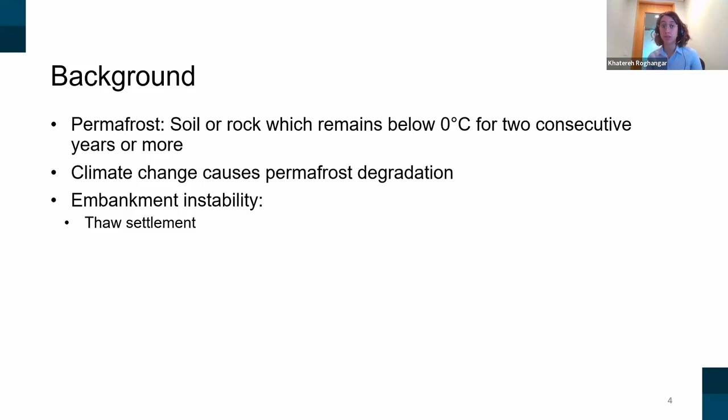Thaw settlement is the most common hazard in cold region infrastructure, and deterministic analysis does not capture the uncertainty; it just gives you a single outcome instead of a range, and the uncertainty in soil properties and climate scenarios needs to be incorporated. That's why we defined our main objective and problem statement: to develop a probabilistic methodology to assess thaw settlement under climate change.

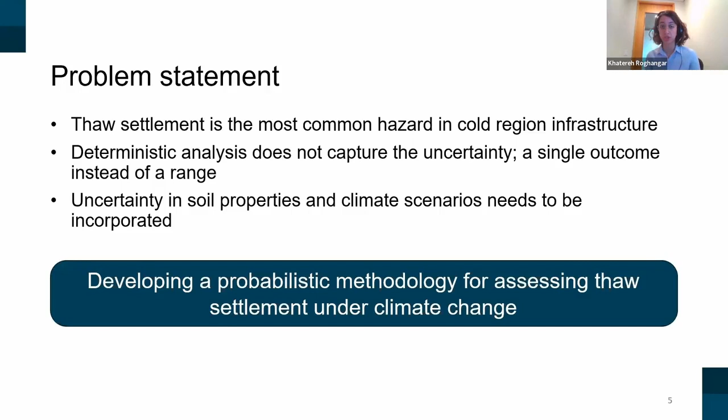To do this big objective, we defined a couple of sub-objectives. One is evaluating the climate impact on embankments in permafrost regions. Another is to integrate probabilistic analysis with thermal modeling, then apply the methodology to linear infrastructure, the railway and highway, and then assess the serviceability and optimize the maintenance strategies.

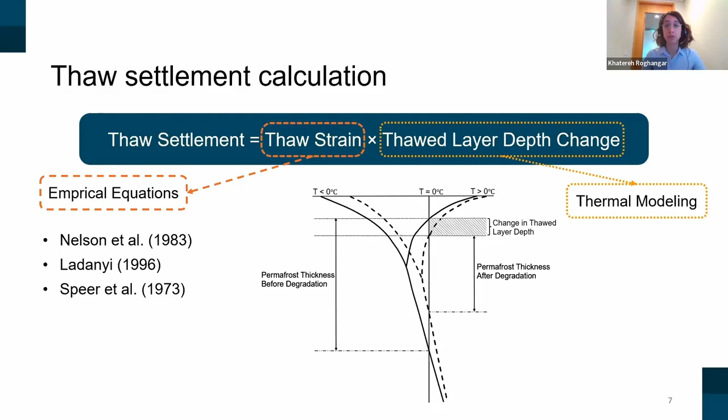Before jumping to any analysis, I should clearly mention that we calculated thaw settlement using the formula you can see. Thaw settlement is the thaw strain times the thaw layer depth change. We got the thaw strain from empirical equations in the literature, from Nelson, Ladanyi, or Speer, and we calculated the thaw layer depth change from the thermal modeling done using the TEMP software. Now let's talk about the deterministic analysis.

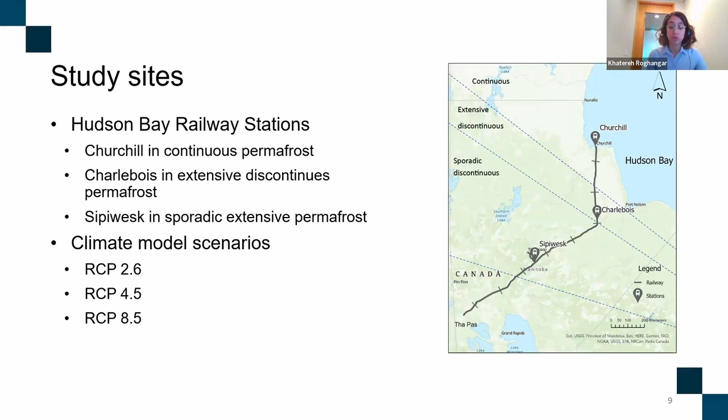We chose 3 study sites on the Hudson Bay Railway corridor. The first was Churchill, located in continuous permafrost. The second was Charlebois, in extensive discontinuous permafrost. The third was Sipiwesk, in sporadic extensive permafrost. To do the analysis, we chose 3 different climate scenarios from CMIP5: RCP 2.6, 4.5, and 8.5.

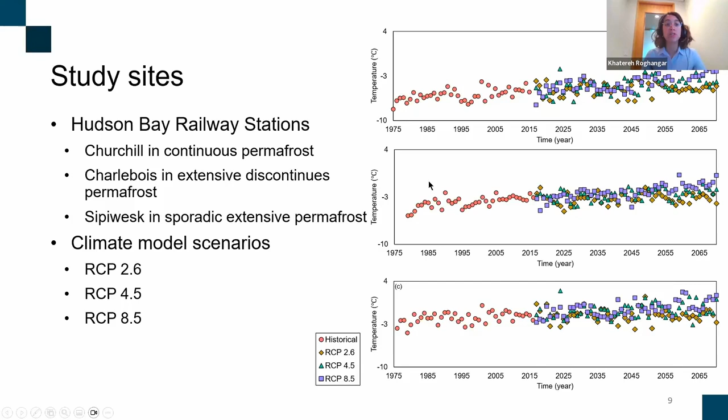What you are looking at here is the air temperature we used for the thermal analysis. The red dots are the historical temperature, and the others are RCP 2.6, 4.5, and 8.5, from the top for Churchill Station, Charlebois, and then the Sipiwesk station.

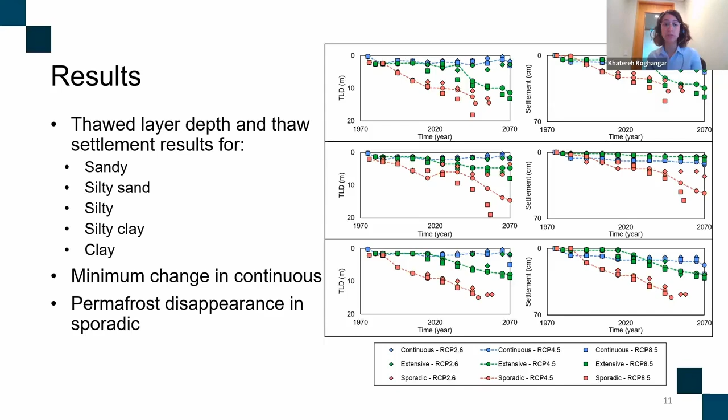But it's important to know that you can see the minimum changes in continuous permafrost because of the colder climate for now and for the future, and the permafrost disappearance in some of the cases in sporadic discontinuous permafrost.

But let's jump into our main contribution, which was developing the probabilistic methodology. But what was the main principle of what we have developed? It was integrated probabilistic thermal modeling to predict thaw settlement and the serviceability of the embankment. So we have done the probabilistic analysis using the Monte Carlo simulation as solver, and we have done the thermal modeling using TEMP. But what is Monte Carlo simulation?

Monte Carlo simulation is a computational technique that can be used to study systems that include uncertainty or randomness. There are a couple of steps to do Monte Carlo simulation. First of all, you should identify your components, and then you should define your parameters. They could be deterministic or probabilistic. It totally depends on your problem and the data that you have.

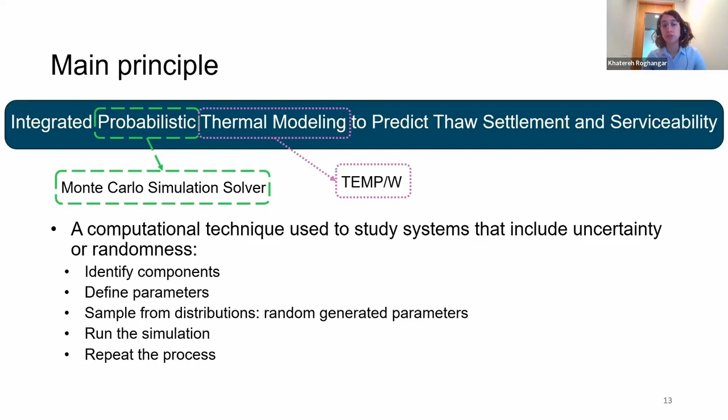And then for the probabilistic parameters, you should get samples from their distributions that you've previously assigned and defined based on, again, the data that you have and your assumptions. You are going to randomly generate the parameters. You should run your simulations and then repeat the process for the other iterations. And the number of Monte Carlo simulations, again, totally depends on you and the problem that you're looking at.

So to do this integrated probabilistic thermal modeling, we have developed a custom Python tool that performs the Monte Carlo simulation. It automates the input generation for thermal modeling, or the TEMP. It calculates the thaw settlement after doing the TEMP analysis, and then it assesses the long-term serviceability of each embankment, and it optimizes grading intervals based on the performance thresholds.

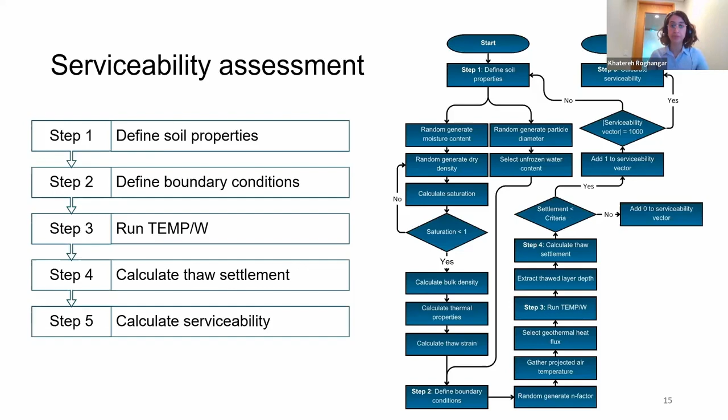But another important part was the optimization method that we've developed. So at the start, you should set your thaw settlement criteria, as I mentioned before, and also your serviceability criteria. For example, you want to have 70% serviceability, and it means that you are going to have your embankment to be serviceable 70% of the time.

After calculating the serviceability and comparing the serviceability with your criteria, it's time for you to decide whether you need grading or regrading your embankment or not. So if the serviceability of your embankment was more than your serviceability criteria, you don't need any grading. But if it was less, you should grade for X years, and X is defined based on your project. For example, it could be 20 or 15 or something.

And then you should again calculate the serviceability and compare it with the criteria. After finding all of the serviceabilities for each year were more than the criteria, you're done and you have a number for the optimized grading interval.

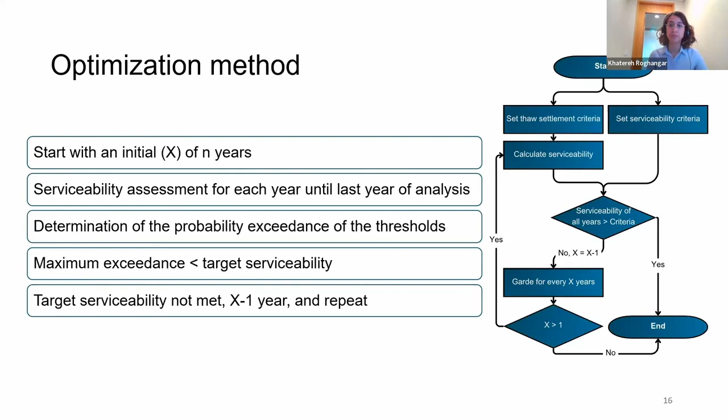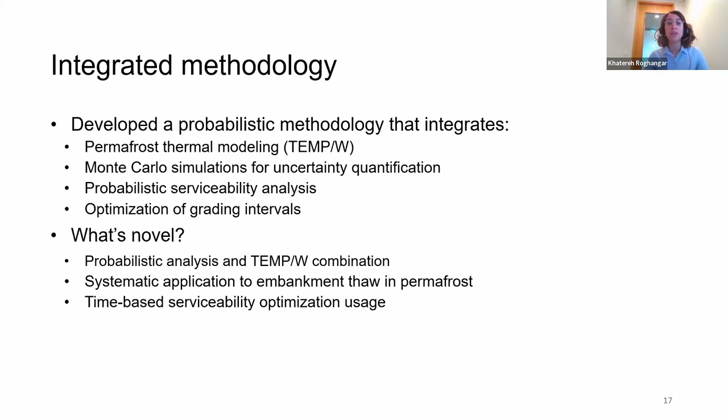So to wrap up what we have done, I can say that we have developed this integrated methodology that does permafrost thermal modeling. It integrates Monte Carlo simulations for uncertainty quantification, and then probabilistic serviceability analysis and optimization of grading interval. But what's novel? What is new about what we have done? The probabilistic analysis and TEMP/W combination is new. The systematic application to embankment thaw settlement in permafrost, again, this is new, and the time-based serviceability optimization usage.

We had 4 initial temperature conditions, which represented different active layer thicknesses at the beginning, which were 0.5, 1, 1.5, and 2 meters. And the boundary condition was the same as the deterministic analysis. The difference was that the N factor was randomly generated this time. And because we had access to CMIP6 climate scenarios, we have used the SSP5-8.5 climate scenario. So based on different conditions, we have done 7,000 TEMP/W simulations for different scenarios.

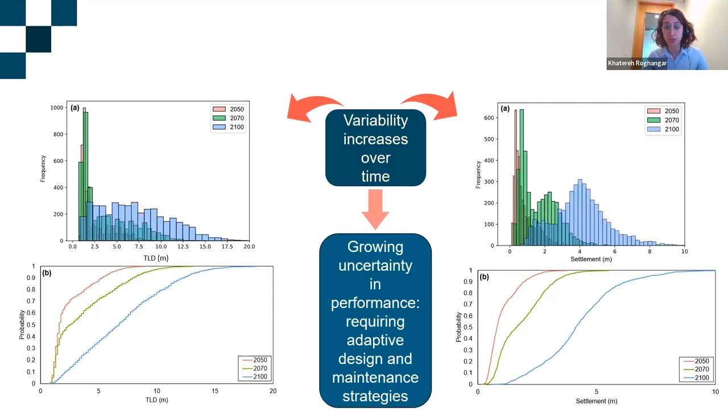So the histograms of the 2100 results for both of the outcomes are much wider, and the CDF plots are less steep. But this growing uncertainty, what is its implication in the performance of the embankments? It means that we are going to require adaptive design and maintenance strategies to be able to keep up with the climate change and the variability that is increasing over time.

And now let's look at the second application, which was on the Inuvik Tuktoyaktuk Highway embankments. So what you can see in the figure is a map of the Inuvik Tuktoyaktuk Highway, and the purple dots are the boreholes that we have used to do our study. So we had 10 boreholes along the ITH corridor, and the mean annual ground temperature at the study sites were between minus 6.5 to minus 3 degrees Celsius in 2017, which is the year that the ITH opened, and we have started analysis from that time.

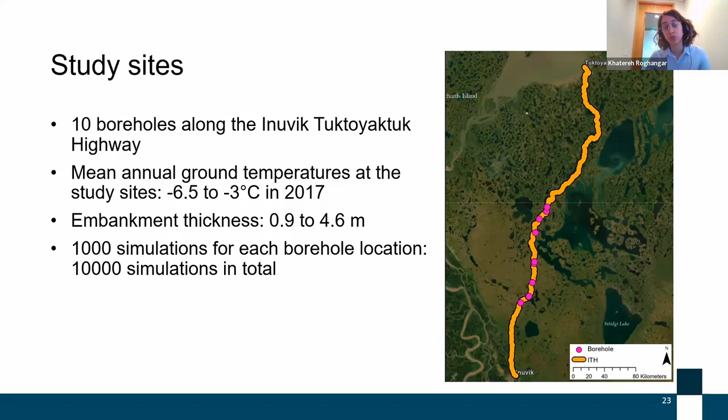The embankment thickness was an important factor here. It varied from 0.9 to 4.6 meters in different boreholes, and we have done 1,000 simulations for each borehole location. So in total, we have done 10,000 simulations.

What you're looking at here is an important result. So you're looking in the y-axis at the differential TLD prediction. Differential TLD means the thaw layer depth at the year that we had in, for example, 2030, 2050, or 2070, minus the initial thaw layer depth at the beginning of the analysis.

So first of all, I should mention that we've categorized the results based on the fill height. So the blue colors that you are looking at in this figure are the thin embankments that had less than 2 meters fill height, and the orange ones are the thick embankments that had more than 2 meters of fill height. But what is obvious here is that most of the thin embankments, except for the ITH 13, have a jump in both the magnitude and the variability of the differential TLD predicted by the year 2070.

And it's really important. It's showing the significant effect of the fill height not only on the magnitude but also on the variability of the predictions. It's important because it supports the need to incorporate embankment thickness as a key parameter in design. So if you have designed your embankment to be, for example, 2 meters and you ran out of money, you may save money at the time of the construction by reducing the fill height, but it will cost you more in the future.

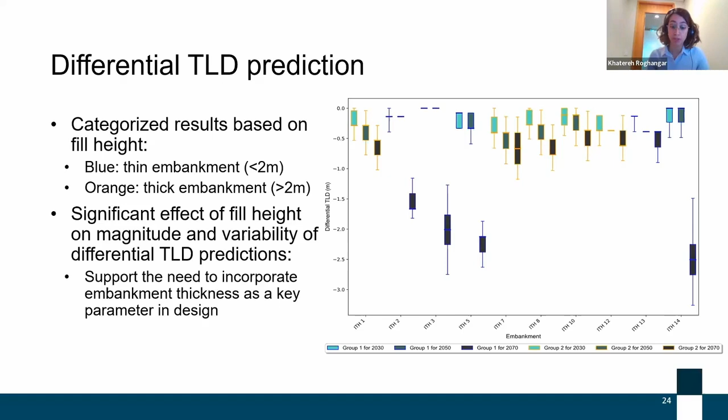And now let's talk about the serviceability assessment that we have done. So we needed a criteria to compare our serviceability and our thaw settlement at this part. But I should mention that serviceability in this study is a pavement's ability to perform its function, which is providing a smooth, durable surface that ensures ride quality, structural integrity, and safety. So we found the International Roughness Index, or IRI, which is a widely used metric for quantifying road roughness, and we have used it to define our thaw settlement criteria.

So the localized thaw settlement can contribute to increased IRI. The more IRI you have, the more roughness you are going to have, and your road is going to be less serviceable. So if you have a thaw settlement at your study site, at your borehole, it's going to increase the IRI.

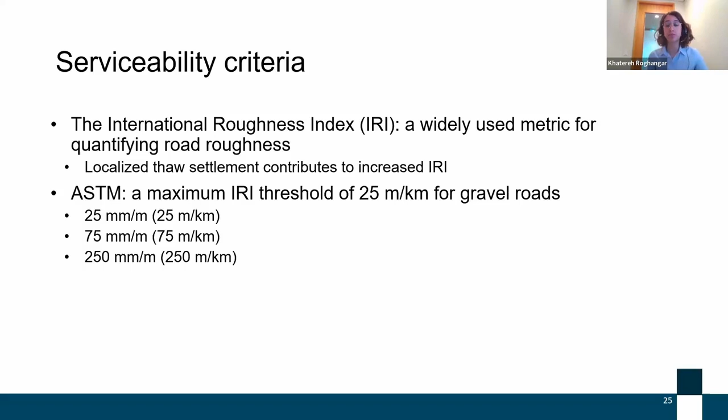But we had looked at different guidelines, and ASTM recommends a maximum IRI threshold of 25 meters per kilometer for gravel roads. But for northern regions and roads and highways, 25 millimeters per meter technically means that you have 25 millimeters of settlement at your location, which is too low because of the size of the trucks and the other factors. So we have defined our thaw settlement thresholds to be 25 at minimum, 75, and 250 at maximum, to be able to look at the serviceability of different embankments.

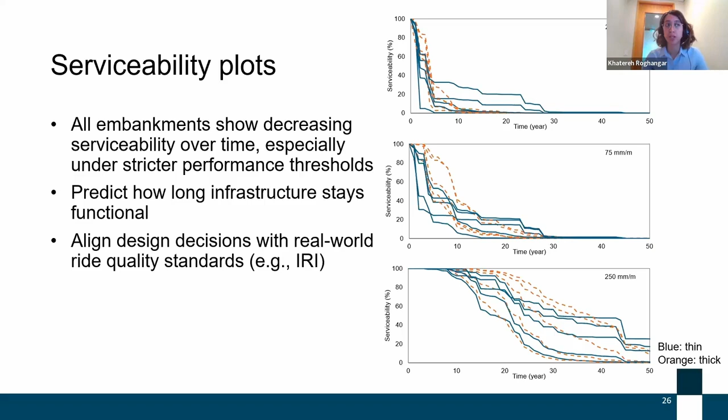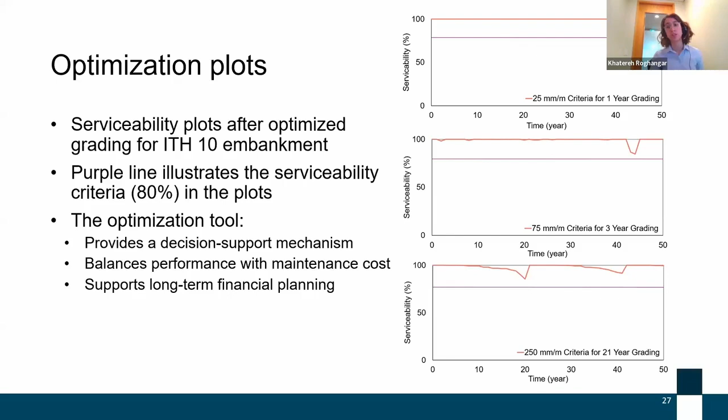But this optimization tool provides a decision support mechanism. It allows engineers to plan interventions proactively rather than reactively. It balances performance with maintenance cost, so you should only grade when needed, not too soon or not too late. And it supports long-term financial planning by aligning maintenance schedules with budget constraints and performance goals.

To wrap up, what were our results' implications for engineering practice? As I mentioned, traditional design often relies on single deterministic predictions, and they are blind to worst case scenarios and under or over design. So the work that we have done enables the probabilistic analysis for TEMP/W.

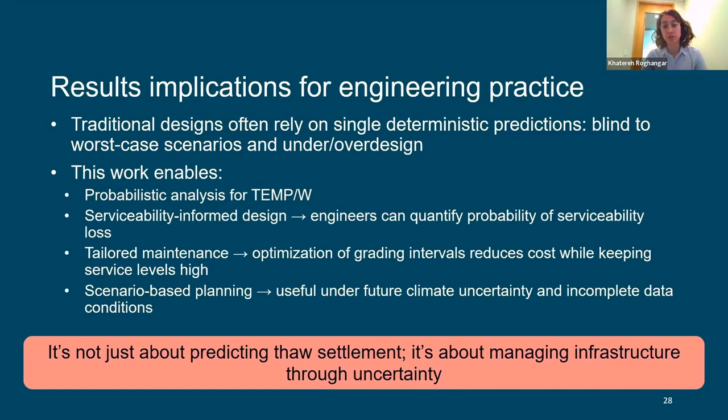It enables serviceability-informed design, and engineers can quantify probability of serviceability loss. It enables tailored maintenance, so optimization of grading intervals reduces cost while keeping service level high. And the scenario-based planning is useful under climate change uncertainty and incomplete data conditions. So I can say that it's not just about predicting thaw settlement, it's about managing infrastructure through uncertainty.

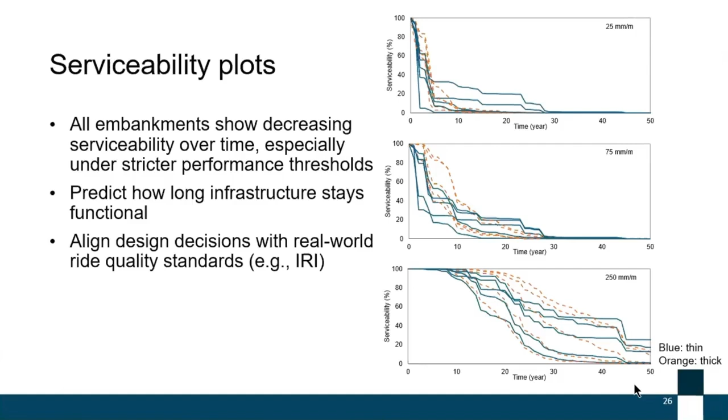Okay. Can I ask one more quick one? In TEMP-W, were you dynamically moving the surface as settlement occurred? Or was it a stable surface? Yeah, it was just the temperature. Okay, thanks. Thank you very much.

I have a quick follow-up on the topic of the modeling. I was wondering how long did it take you to run thousands of simulations in TEMP-W, and what was the computing power required for that? That's a good question. Actually, for the first application, the HBR, we had only one simple soil column, and it took 15 minutes for each simulation.

But for the embankments, we had a much bigger simulation, and it took about 25 to 30 minutes for each simulation, which was not that bad. For example, 1,000 simulations for each embankment took about, I can say, 2 days maybe. So yeah, it wasn't that bad.